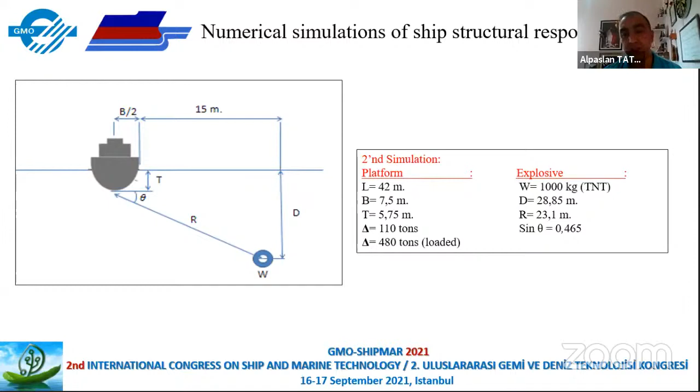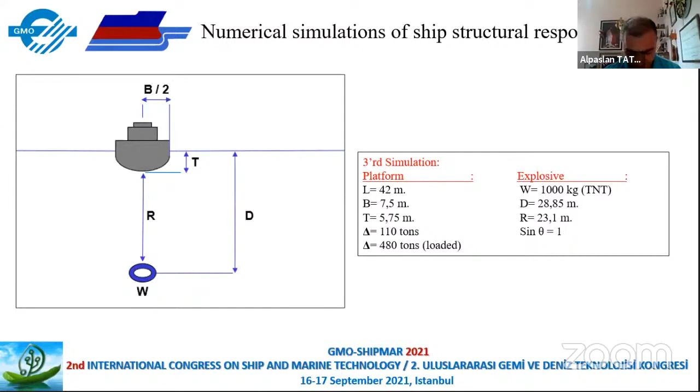The third simulation is similar to the second, but the location of the explosive is just underneath the ship. So theta equals 90 degrees, sine theta equals 1.

In order to observe certain locations on the ship hull, 8 specific nodes on the bottom of the model were selected. Here are the nodes.

At these 8 nodes, simulation data were recorded using the database history node command. This particular feature is crucial in obtaining the structural displacements, velocities, and accelerations at selected locations.

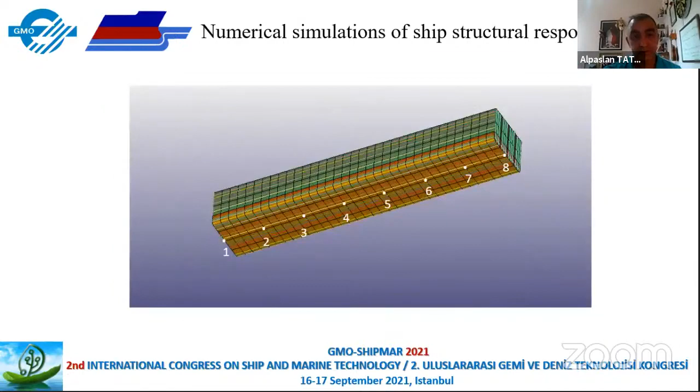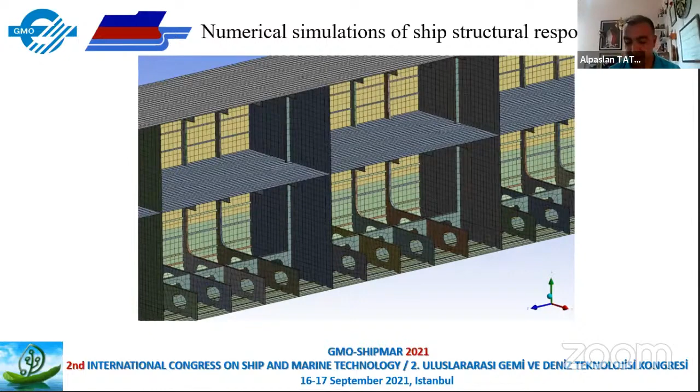We use 5 different kinds of beam elements, with 3 different sizes of stiffness for the transverse elements, and fine steel plates of 5 millimeter and 7 millimeter thickness. These are used as shell elements covering the box-like form.

Every simulation took approximately 10 days. Here you can see the shock wave effect on the ship-like form in the third simulation.

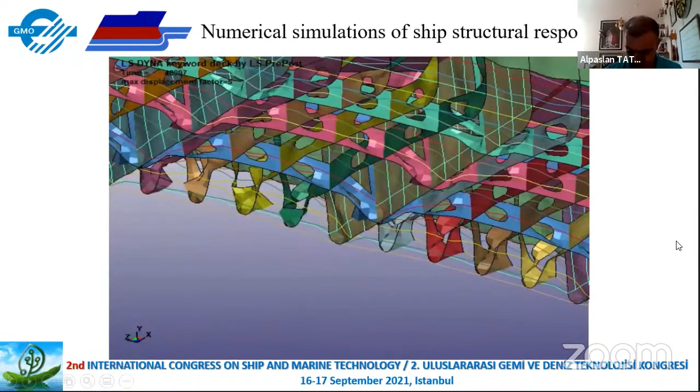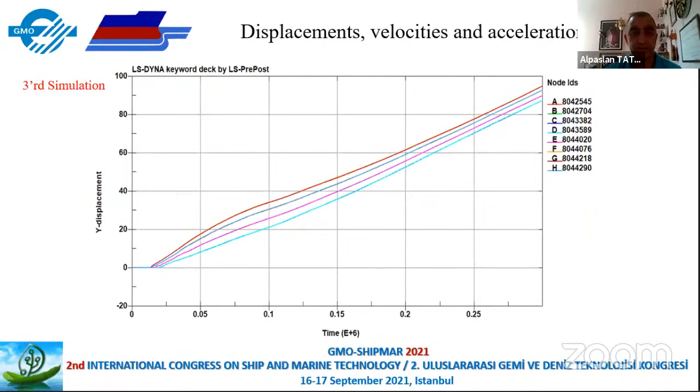Displacements of the third simulation, velocities of the third simulation, accelerations of the third simulation.

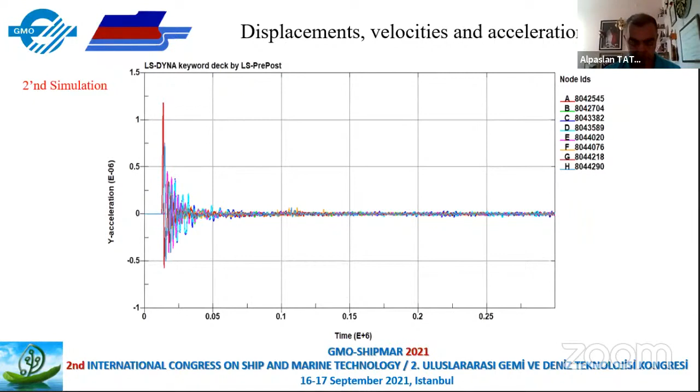The maximum displacement values, averaged for all 8 nodes, for simulations 1, 2, and 3 are found to be approximately 37.8 centimeters, 56.6 centimeters, and 90.8 centimeters, respectively. The computed deformation for simulation 3 is obviously too large for the material to withstand without breaking, hence it should be viewed with caution.

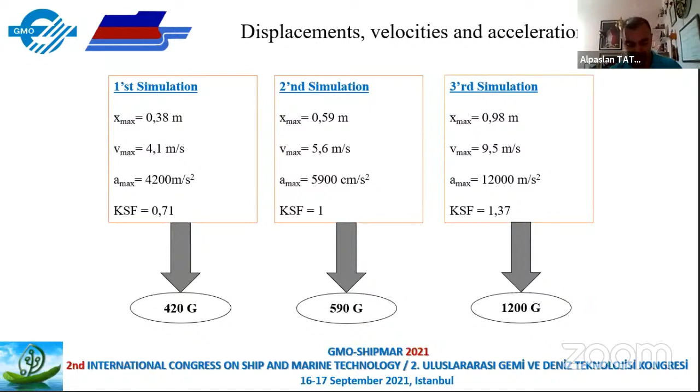Effects of a 3D underwater explosion on a box-like structure representing a ship beam are investigated through numerical simulations, employing the software LS-DYNA with the ALE approach. 3 different simulations are performed to explore the effects of variations in KSF.

The second simulation, designed for KSF almost equal to 1, represented a case for which field measurements were available though not open to general use. With the use of limited simulation data, a linear relation between the maximum deformation and the corresponding KSF values is established.

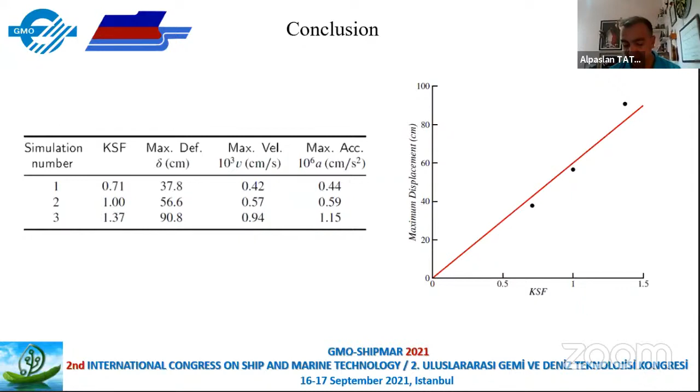So, 3 different simulations are performed to explore the effects of variations in KSF. With the use of limited simulation data, a linear relation between the maximum deformation and the corresponding KSF values is established.

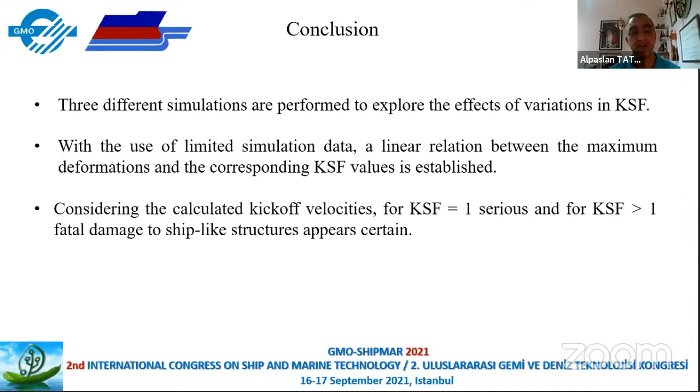Considering the calculated kick-off velocities for the KSF equal 1 serious, and for KSF larger than 1, fatal damage to ship-like structures appears certain.

Thank you. I'm ready to answer your questions and comments.

Thank you. Also, maybe we should clarify a little about this KSF. I didn't notice if you defined it there, but KSF is a measure of actual damage established through the years. It is related to the explosive mass, the distance, and the angle of the explosion taking place with respect to the keel of the ship.

So it seems, if I may contribute to the conclusions, that KSF is a good measure to estimate the damage. At least it can tell us if there will be serious or even devastating damage, so from the beginning we can make an estimate of the extent of the damage. I just want to clarify this as an advisor to Colonel Tatlisuluoglu in this work.

But we can take, of course, any other questions and comments. Yes, thank you. Thank you very much.